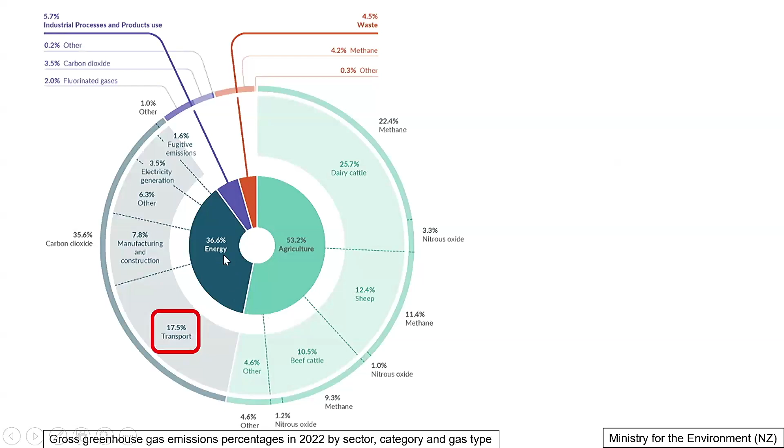So looking at the New Zealand greenhouse gas emissions in 2022, almost half of the energy emissions comes from transport. Regarding heavy vehicles, while they represent only 4% of the New Zealand total fleet, we see they contribute about 25% of these emissions. They are expected to rise to 41% by 2055, and that clarifies the importance of decarbonizing this challenging sector.

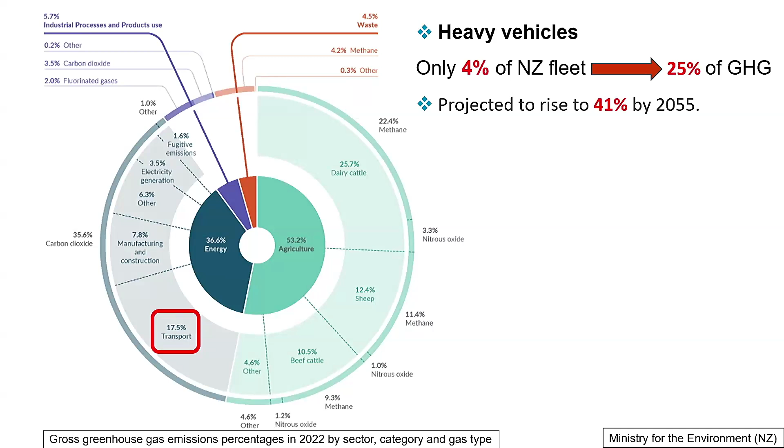So hydrogen is a promising alternative fuel, but currently the uptake of hydrogen heavy vehicles is still facing lots of challenges. The main two challenges are the lack of hydrogen infrastructure and the high capital cost of hydrogen vehicles. So, for example, customers will not purchase hydrogen vehicles unless adequate fueling is available.

Then manufacturers will not produce vehicles without sufficient demand. And then fuel providers will not install hydrogen stations for customers that do not exist. So these challenges create a feedback loop, known as the chicken and egg problem, which is a common issue that faces most alternative fuel vehicles.

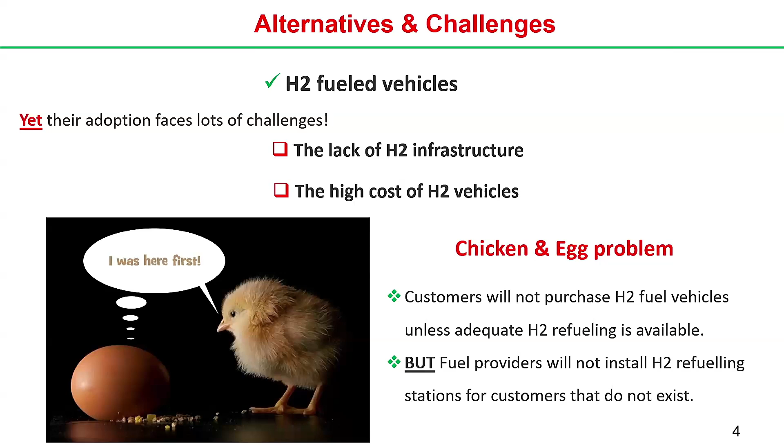What about battery electric vehicles? Do they have a role in decarbonizing heavy transport? So I would like to clarify that in our model, we categorized the New Zealand heavy fleet based on vehicle weight into three main categories. So battery electric vehicles for sure could play a significant role under this category. But given the heavy load and the long travel distances of these two categories, battery electric vehicles couldn't play a role under these two categories.

So currently we are simulating the hydrogen heavy vehicles under these two categories and assuming that there are no alternative vehicles within this class. But in our next simulation, we will incorporate this class and incorporate battery electric vehicles and any other alternatives as well.

So for example, for battery electric vehicles weighing more than 30 tons and traveling 500 kilometers, the expected battery weight ranges between 5 tons and 12 tons, based on the battery density and the vehicle efficiency. And that represents about 15 to 30% of the payload, which makes these vehicles economically not viable.

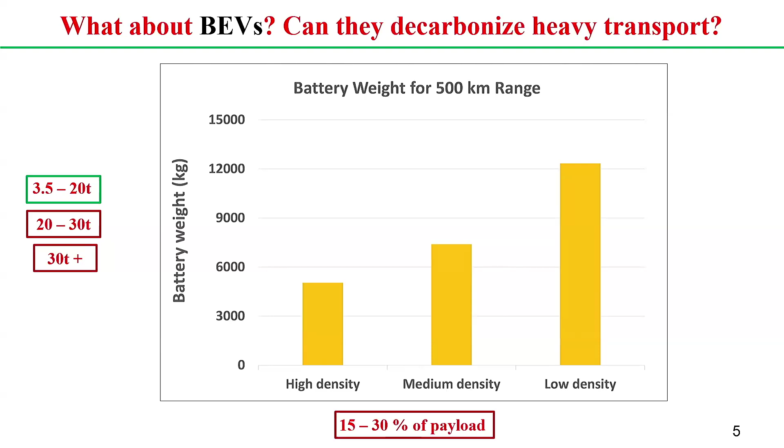So as I mentioned, that clarifies the challenges that face decarbonizing the heavy transport. So hydrogen diesel dual fuel vehicles could be a potential alternative. In New Zealand, H.W. Richardson started converting conventional diesel vehicles to operate on a mix of hydrogen and diesel. These vehicles are flexible to operate on 100% diesel if there are no hydrogen stations available, and they have the advantage of traveling a farther range.

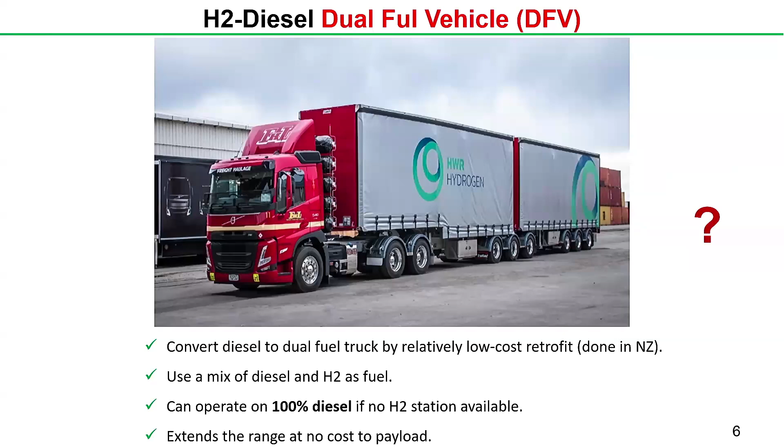But we still don't know what actual role they could play in decarbonizing the New Zealand heavy transport, and that led us to the research questions. So the first objective of the current research is to investigate the role of dual fuel vehicles in decarbonizing the New Zealand heavy transport, and how they could impact the uptake of other hydrogen vehicles as well. They could positively or negatively impact the uptake of other hydrogen vehicles.

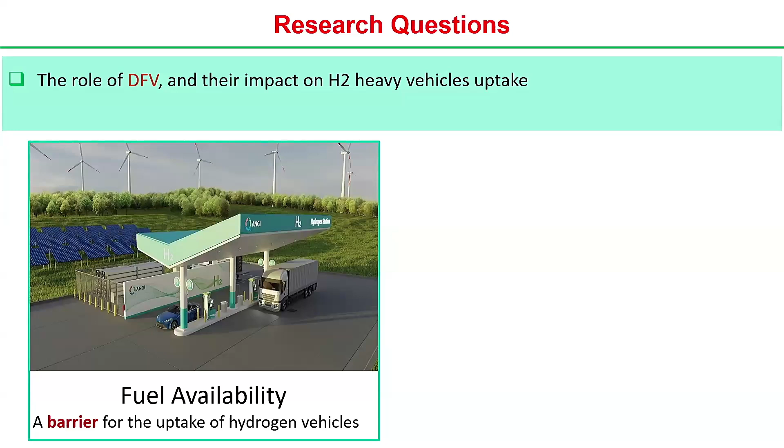So in order to do that, we need to simulate the consumer behavior towards these alternatives and all other technologies as well. So based on literature, we found that there are two important theories simulating consumer behavior towards alternative fuel vehicles. The first one focuses on the impact of fuel availability as a barrier for the uptake of hydrogen vehicles. The other one focuses on the annual refueling cost as an important economic factor.

But we actually don't know what impacts consumer decisions toward alternative fuel vehicles. So in order to understand consumer perspectives on fuel availability versus annual refueling cost, we need to simulate the uptake under these theories.

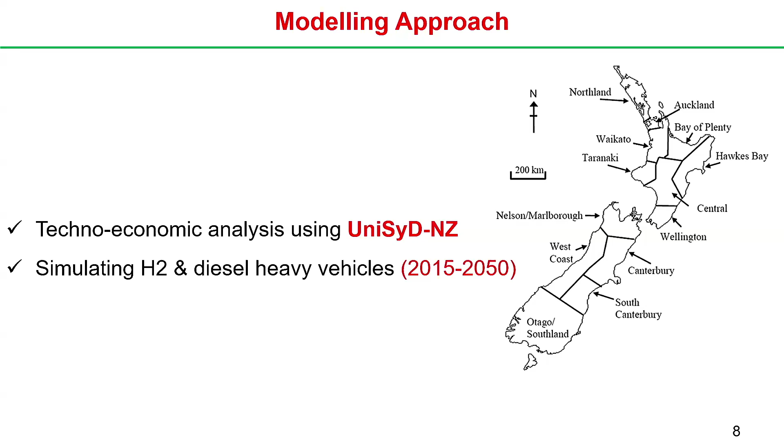So we have done a techno-economic analysis using the existing model UniSyD-NZ with the aim of simulating hydrogen and diesel heavy vehicles from 2015 to 2050. So what is UniSyD-NZ? It's a multi-regional system dynamics model that has been used to simulate the New Zealand energy system for several years. The model divides New Zealand into two main islands and 13 regions. The model enables a simultaneous simulation for all these sectors.

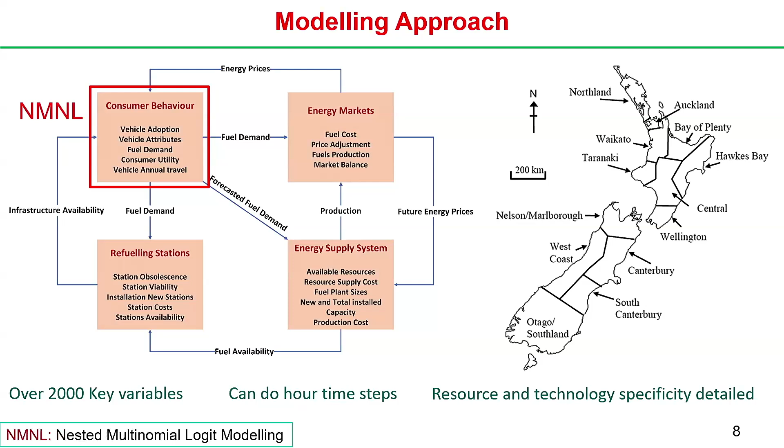The vehicle model depends on the consumer choice behavior in differentiating between the different technologies using the nested multinomial logit model. So the model can forecast the interactions of over 2,000 key variables and can do hourly time steps. And the model is rich in terms of technology specificity. So this is the nested vehicle structure, having four main nests.

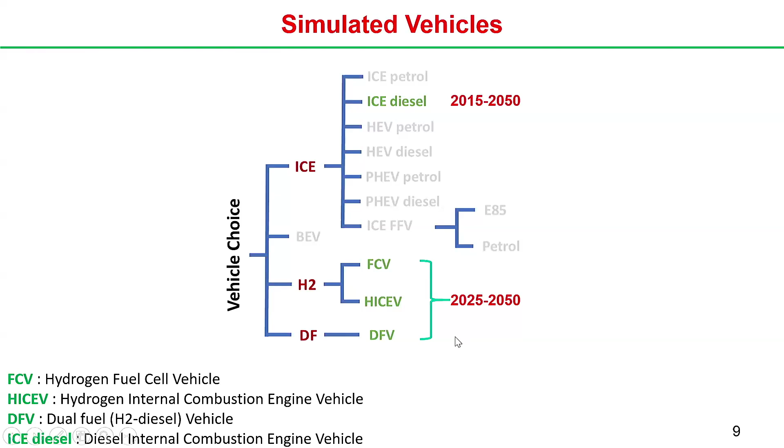In the current simulation, these are the vehicles that we are considering: the conventional diesel heavy vehicles, hydrogen fuel cell vehicles, hydrogen internal combustion engine vehicles, and hydrogen diesel dual fuel vehicles. And of course, these are heavy vehicles. So the simulation period is from 2015 to 2050, but the introduction year of hydrogen vehicles is in 2025.

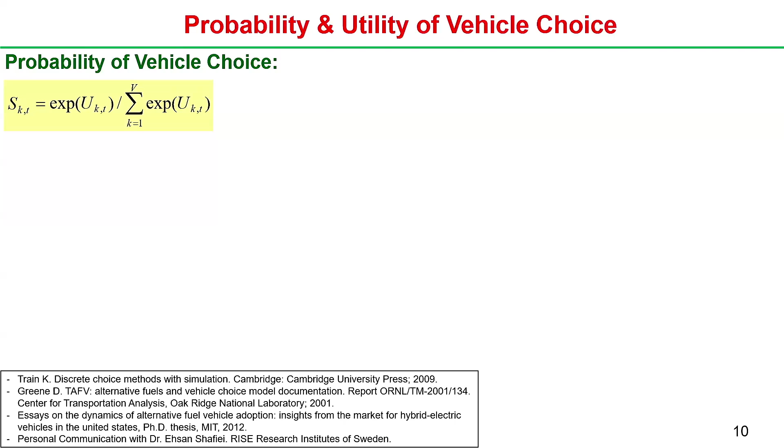So this algorithm gives the probability of the chosen vehicles by consumer based on their preferences towards vehicle attributes. So what are the vehicle attributes? They are the vehicle capital cost, the annual maintenance cost, annual fuel cost, battery replacement cost for electric vehicles, vehicle range, and the fuel availability.

So as I mentioned, we focus on two main theories. So this is the first utility function that has the fuel availability as a main factor. So from now onward, we will call this fuel availability utility. The second utility function, we are not comparing between two totally different utilities. It's exactly the same, but rather than fuel availability, here we have the annual refueling cost. So we will call this refueling cost utility.

But so what do I mean by refueling cost utility? It's not the fuel cost, as we have the annual fuel cost as a separate factor. So the refueling cost is related to the refueling process, which is mainly based on four main factors: the search cost, which is the time and fuel consumed while finding the nearest station, the refueling time cost, the queuing cost, and the risk of being out of fuel.

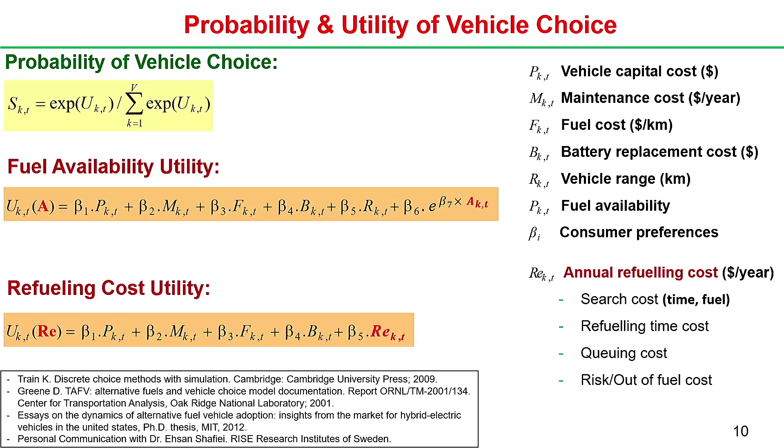So we run different scenarios. Today, I will focus on three main ones. So in the business as usual scenario, we simulated the conventional diesel vehicle and two types of hydrogen vehicles: hydrogen fuel cell vehicles and hydrogen internal combustion engine vehicles without applying any policies. Same vehicle types are simulated in the second scenario, but here we applied a kind of policy, assuming that 7 hydrogen stations are established per year from 2025 to 2040.

We incorporate the hydrogen diesel dual fuel vehicles in the third scenario. But here I would like to clarify what the difference is. In the first and the third scenarios, the model automatically installs hydrogen stations based on the fuel demand and vehicle uptake. While here we are forcing the model to install 7 hydrogen stations per year as a kind of sensitivity analysis in order to know how hydrogen stations impact the uptake.

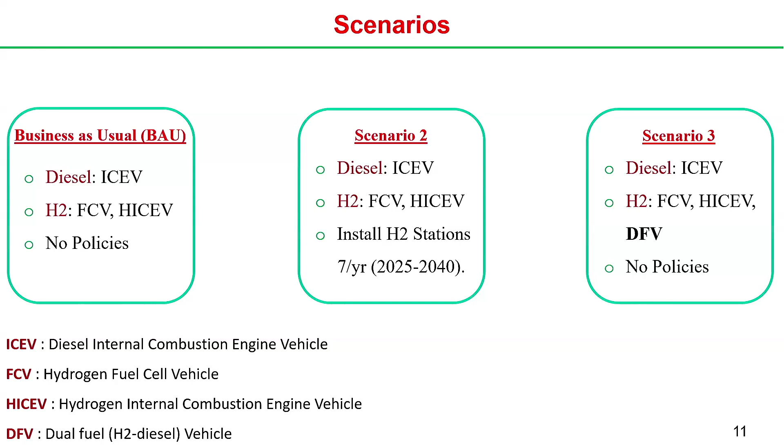So this shows the uptake of hydrogen vehicles under the 2 utilities. As mentioned, this one focuses on the impact of fuel availability on consumer decisions, while this one focuses on annual refueling cost, while the other factors are the same. So there's no big difference overall in the uptake. We see that the uptake of hydrogen fuel cell vehicles and hydrogen ICE is very low in the first decade under the 2 utilities. Then they significantly increase beyond 2035.

And we see that the consumers favor dual fuel vehicles over time under the 2 utilities. So we can see that due to the low capital and fuel cost of dual fuel vehicles and their flexibility to operate on 100% diesel in case there are no hydrogen stations, that makes them a good alternative and they can be used as a transitional technology.

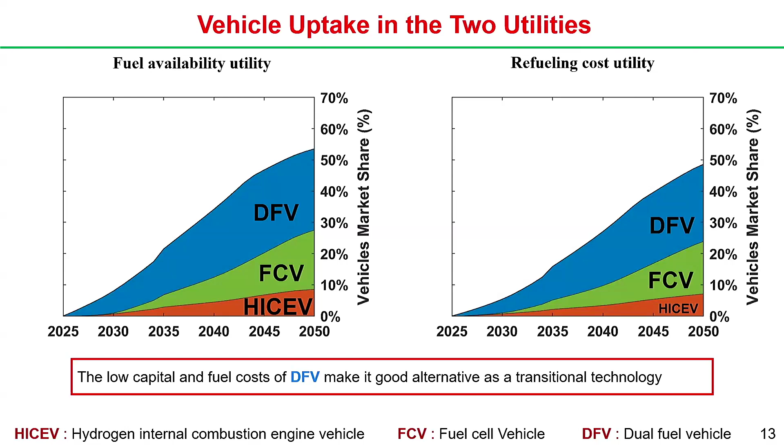This graph shows the uptake of fuel cell vehicles under the fuel availability utility in 3 different scenarios. So we see that supporting hydrogen stations significantly increases the uptake of fuel cell vehicles over time. Similarly, we can see that the introduction of dual fuel vehicles increases fuel cell vehicle uptake, particularly at early stages, or in the first 15 to 20 years.

While if refueling cost is the main factor, the uptake of hydrogen vehicles under this utility function is less sensitive to the lack of hydrogen stations. So the uptake of fuel cell vehicles, with or without dual fuel vehicles, is almost the same.

But the common thing, we can see that the uptake of fuel cell vehicles in the scenarios with dual fuel vehicles under the 2 utilities, the long-term uptake is less than the other scenarios, meaning that dual fuel vehicles may impact the uptake of fuel cell vehicles in the long term. So dual fuel vehicles could play a significant role, as we found that they increase fuel cell vehicle uptake, particularly under this utility function. So they act as supporting hydrogen stations, but they may compete with the long-term uptake of fuel

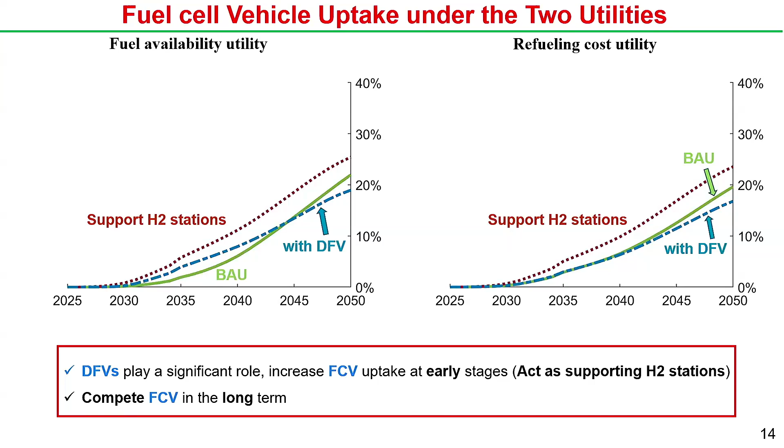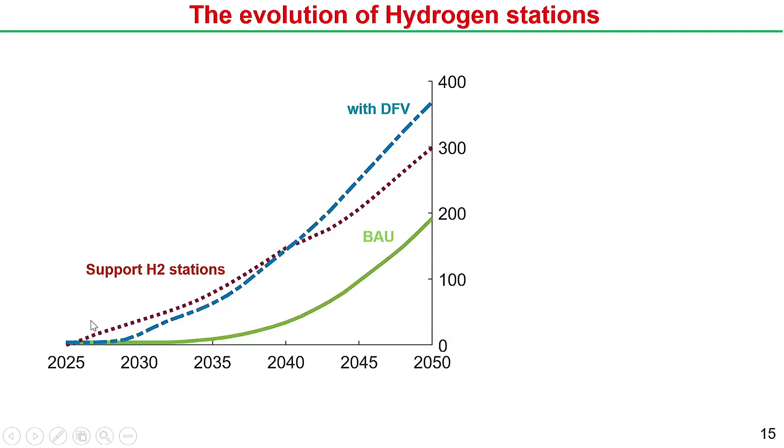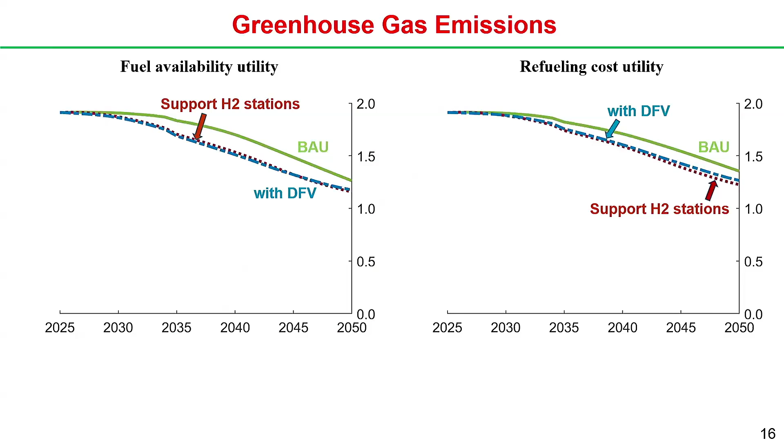This shows the greenhouse gas emissions under the 2 utilities in the 3 different scenarios. It's obvious that both scenarios, supporting hydrogen stations and the introduction of dual fuel vehicles, significantly decrease the greenhouse gas emissions over time. So the main conclusion is that we can say that the dual fuel vehicles could play a significant role in decarbonizing the New Zealand heavy transport.

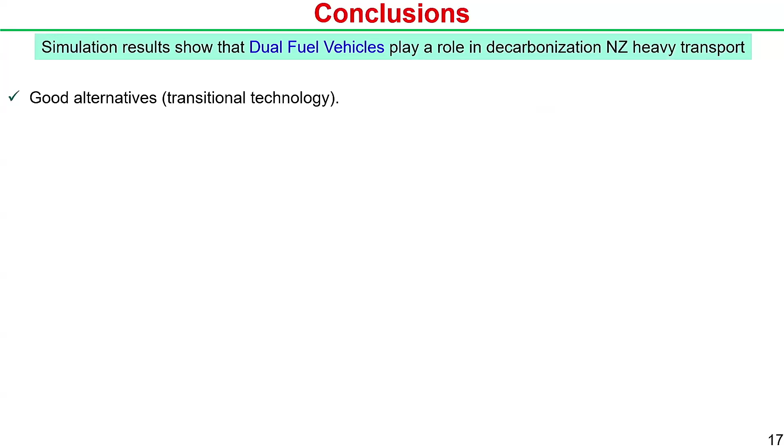So being that the high capital cost and the lack of infrastructure act as the main barriers for uptake of heavy hydrogen fuel cell vehicles, they are a good alternative and could be used as a transitional technology. And we found that they increase fuel cell vehicle uptake and accelerate the evolution of hydrogen stations as they act as supporting hydrogen stations. And then they accelerate the reduction in greenhouse gas emissions, but they may compete and impact fuel cell vehicle uptake at later stages.

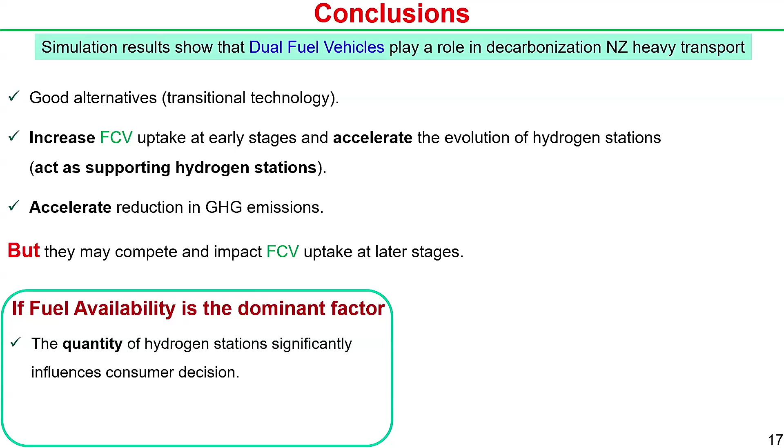Regarding the consumer behavior towards the two utilities, if fuel availability is the dominant factor, then the quantity of hydrogen stations significantly impacts and influences consumer decisions toward alternative fuel vehicles, so that high infrastructure is required.

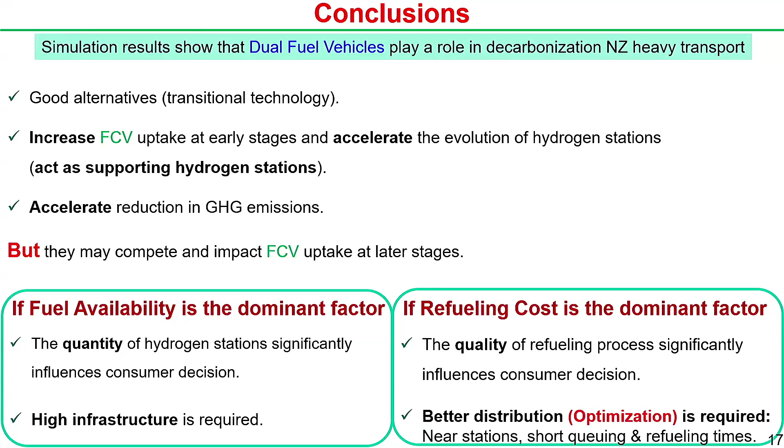On the other hand, if refueling cost is the dominant factor, then rather than increasing the number of hydrogen stations, we found that the quality of the refueling process significantly influences consumer decisions, so that rather than focusing on high infrastructure, a better distribution of hydrogen stations, which can guarantee near distances between stations and short queuing and refueling times, is significantly required.